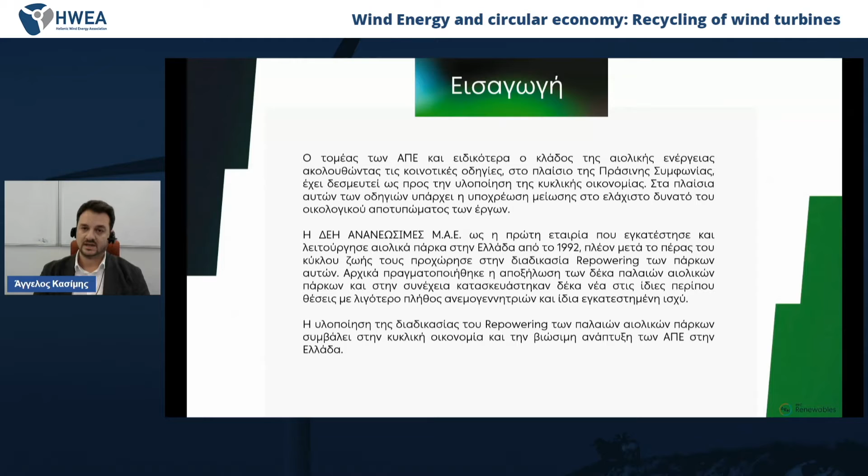PPC Renewables was a pioneer in Greece. It installed the first wind farm in the beginning of the 90s, so closing the end of life of the equipment, beyond the 20 years, we are now faced with the challenge of repowering the equipment. This process started in 2010 and was completed in 2018, and then we proceeded to the installation of new wind farms in the same areas, same location as the older farms.

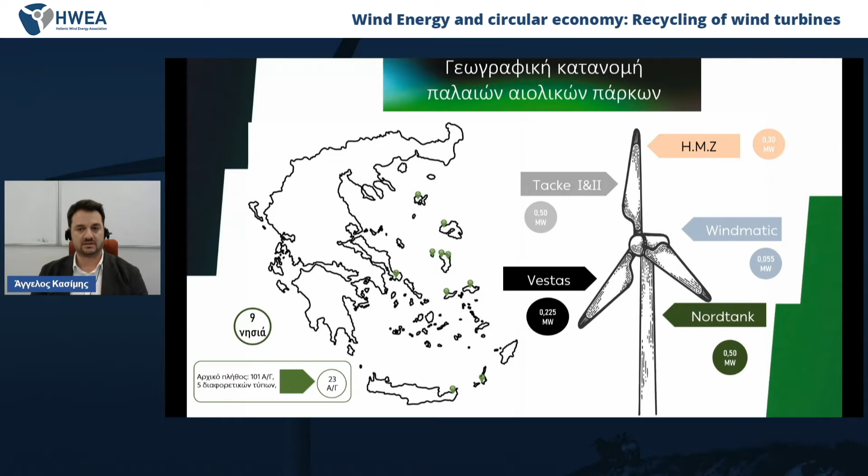The older wind farms which were repowered were on the islands of the Aegean, for example, Chios, Limnos, Samos, Ikaria, Karpathos. In total, we had 101 wind turbines, and by repowering, we have now brought the number to 23. So the maturation and advance of wind power technology is huge, if we also take into consideration the fact that the maximum power of wind turbines was 500 kilowatts in the past. There is no such number currently in production. The installed capacity on average now is 2 to 3 megawatts.

And now repowering has been divided in two stages. The first stage is the dismantling, decommissioning of the equipment, where we decommission, dismantle and manage the components on the ground, wind turbines and air grids. In this case, we dismantle pillars, cables, transformers and the blades. Then, for the second stage of implementation, we dismantle the infrastructures that are invisible, cables and foundations in the ground.

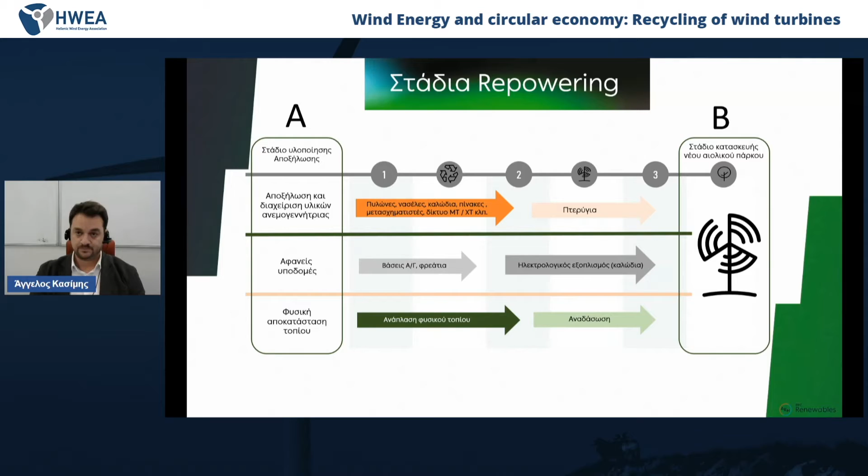The third stage is the rehabilitation of the natural environment on the site of the pre-existing wind turbines, but the number of the wind turbines has of course been reduced by repowering. And in many cases, according to the law and environmental terms, we have proceeded to reforestation activities either in the same area or in the broader region. The second stage has no surprises. This is the installation of the new wind farm at the same site. So a new wind farm is replacing the older one.

The challenges we were faced with throughout this repowering process have been mostly on the islands, where there were lacks in terms of infrastructures. Certified facilities, for example, for management of equipment. There was no expert staff which is needed for such a process. And if you add to the equation the fact that our islands, because of the remote areas where they are located, are dependent on the weather conditions, you can realize that all the works and transportation of materials, machinery and staff have been a headache for the process to be completed.

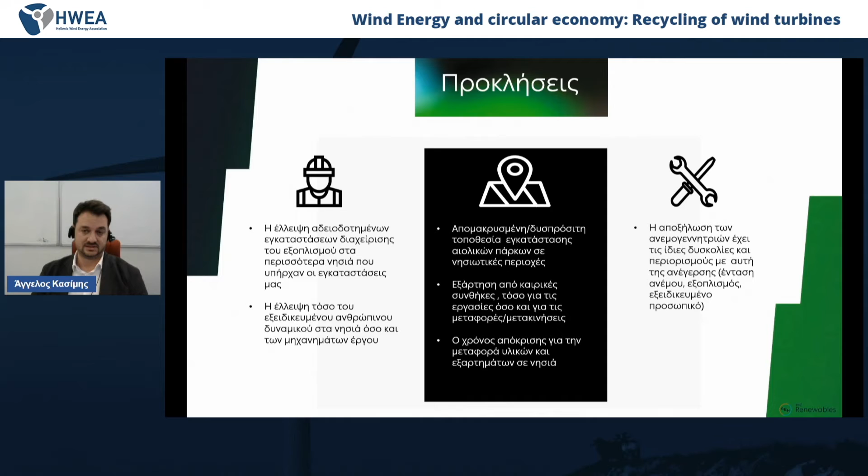Finally, we could say that decommissioning of the wind turbine equipment actually involves the same difficulties and concerns as the installation of new equipment. I mean that you have the factor of the intensity of the wind, for example, which is a major problem concerning the decommissioning or dismantling of the equipment. Now I will talk about the adequacy of the decommissioning entities.

The first thing we have to take into consideration is the technical adequacy of the operator dismantling. They have to have experience on that, and what is more, decommissioning wind turbines of an age of 20 years or older, you do understand that the crews are not aware of the technical problems of the time, back 20 years. So we have to be very cautious which engineering crew we engage.

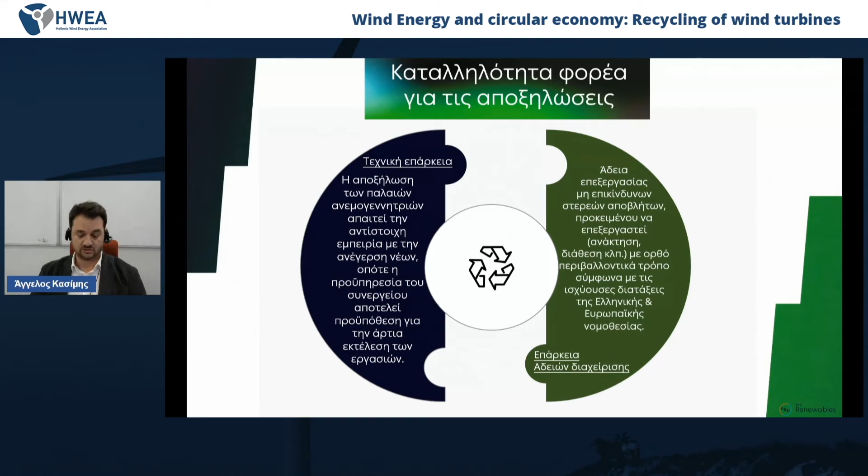During this process, we have to take also into consideration that the sites where the wind turbine equipment has to be transported are both subject to licensed bodies and that the transporters are licensed to handle such equipment. Let's talk about the decommissioned material management options. Once decommissioned, the first we need to take account of is the commercial perspective.

Another option would be to turn all this equipment to scrap, recover steel, and scrap material is then managed by licensed bodies properly. A fourth option that is really interesting, and I would like to welcome ELETAEN's initiative together with the municipality of Trikala, is to repurpose those materials. Parts of the wind turbines can be used such that society can welcome their use.

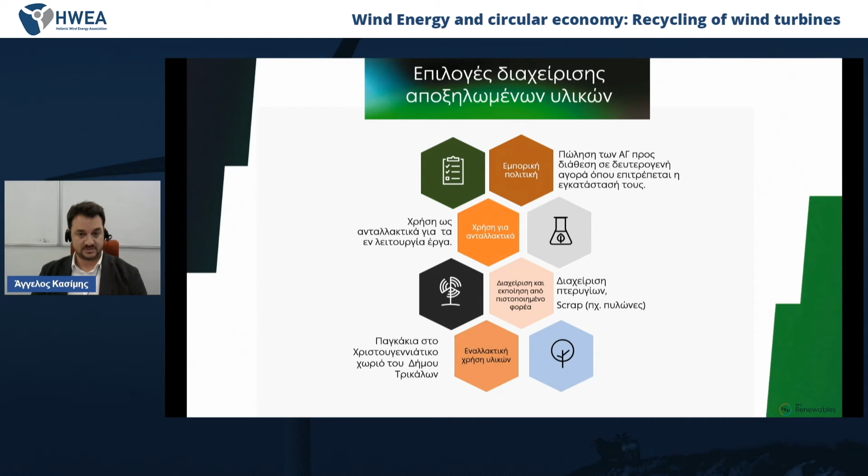An example of that is the Mill of Elves in Trikala, the Christmas market, where blades were turned into benches and signboards within the Christmas village. And we really need to express our gratitude to the municipality providing us with this opportunity, having such a wonderful case demonstrated.

In terms of decommissioning on the site, first and foremost, we need to investigate accessibility to wind farms in order to see whether access of large machinery is possible on site. Secondly, the reverse accessibility has to be considered. We dismantle equipment and store it temporarily either within the farm or nearby, and subsequently, in our case, it is taken by ship to its end management facility.

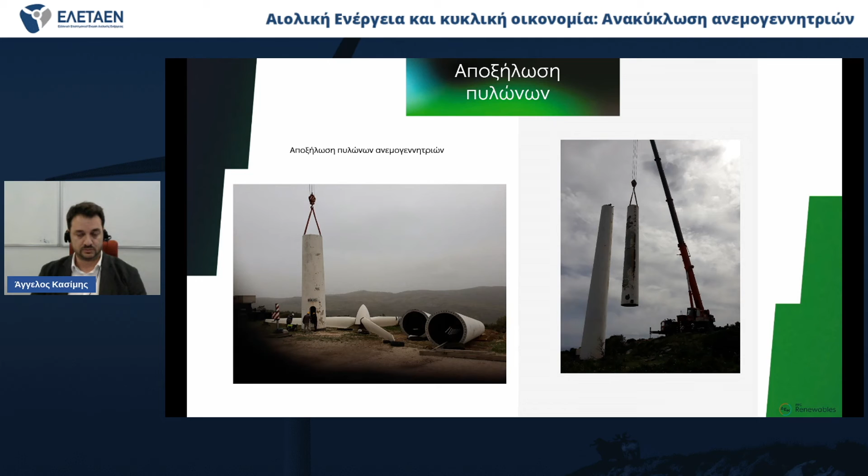Wind turbines are treated in non-hazardous solid waste management facilities. Otherwise, they're taken to other facilities to obtain steel out of the material. We proceed likewise when all equipment is to be transported to secondary markets. Here are some photos of legacy wind farms being dismantled. Material is being arranged within the site, similarly as when erected. And here, in terms of reverse access to site, you can imagine the difficulties for transport.

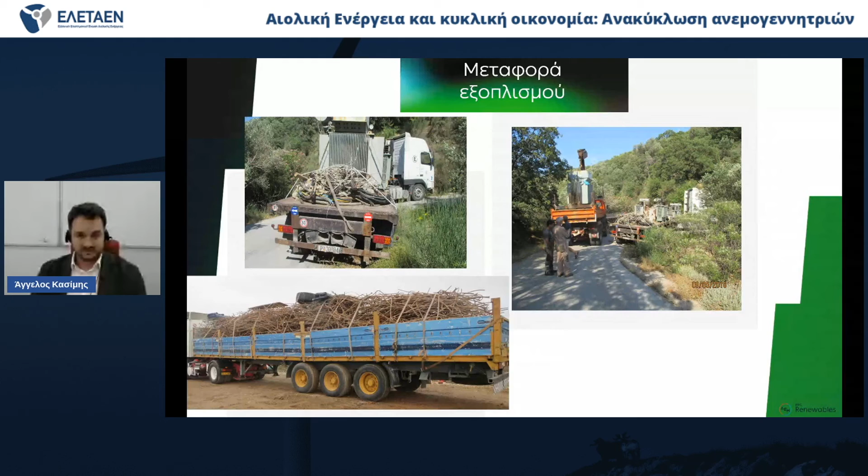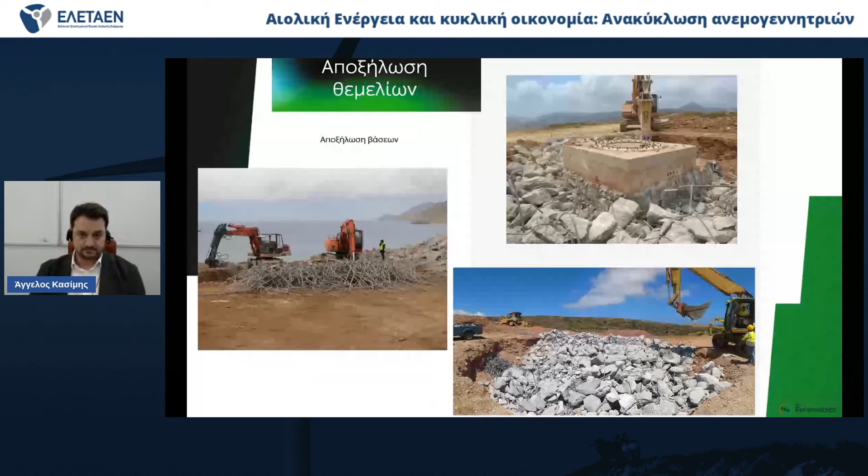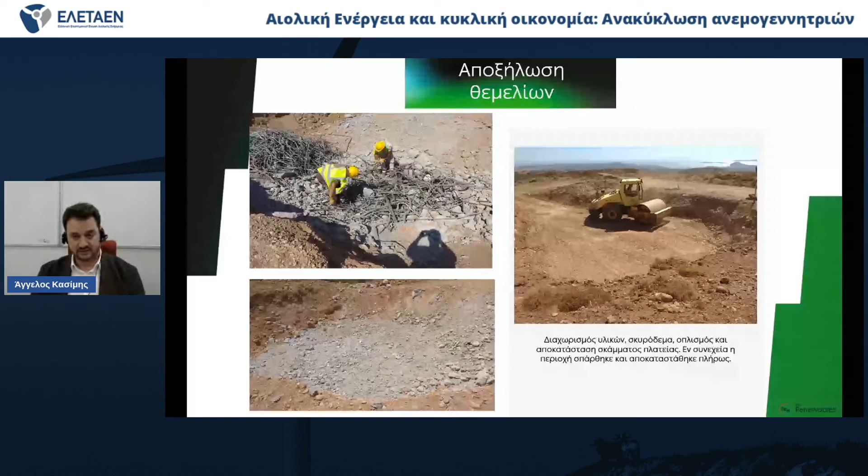At the bottom, you can see a truck loaded with reinforcements obtained from foundations of a wind farm. Here, you can see that foundations are being shredded and materials are being separated. Separation between reinforcement and gravel. Subsequently, after cleaning the foundation, it is backfilled using material from nearby, and finally one can observe that the landscape has been reinstated.

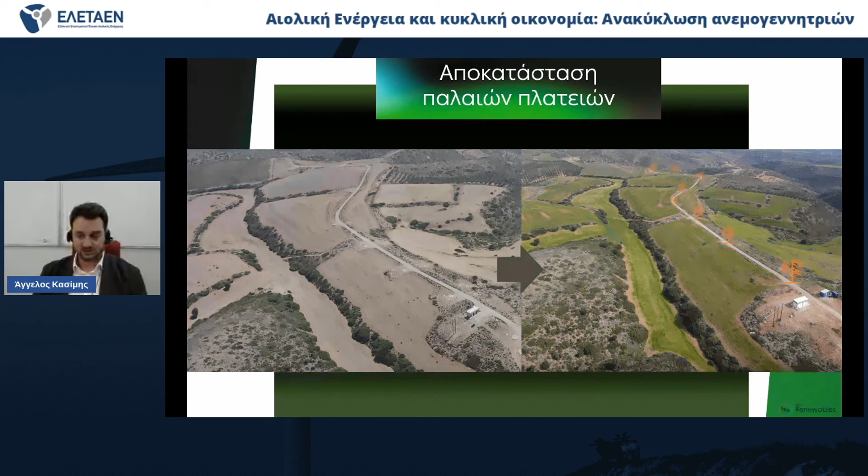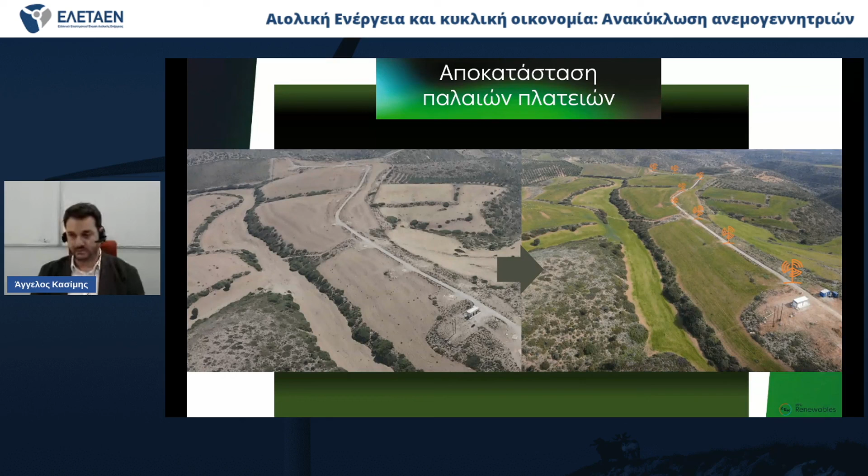At the bottom you can see the two new repowering wind farms. In front of them used to be the site of the legacy dismantled wind farm. On this slide, I would like to talk about the repowering project in the Moni Toplou wind farm on Crete. On the left-hand side is the state of the wind farm after removing the wind turbines. Foundations are still there, whereas on the right-hand side, both foundations and material have been removed, and the natural landscape has taken its place. Turbines have been replaced with two wind turbines of 900 kilowatts each.

Active use of wind turbine materials, such as the Christmas village in Trikala deployment, was very successful. Going forward, we stay in coordination with the municipality, and together with the Hellenic Wind Energy Association, we have further projects in the pipeline.

As to our conclusions, the difficulty we were faced with is that there was no technical guideline in place for us. With the existing institutional regulatory framework and the conditions set for each wind farm individually considered, we have managed to complete this process successfully. It is a lesson we have drawn, and on this approach we will go forward in next projects. Repowering, in our experience, is a very complex and demanding process, equally to erecting a new wind farm.

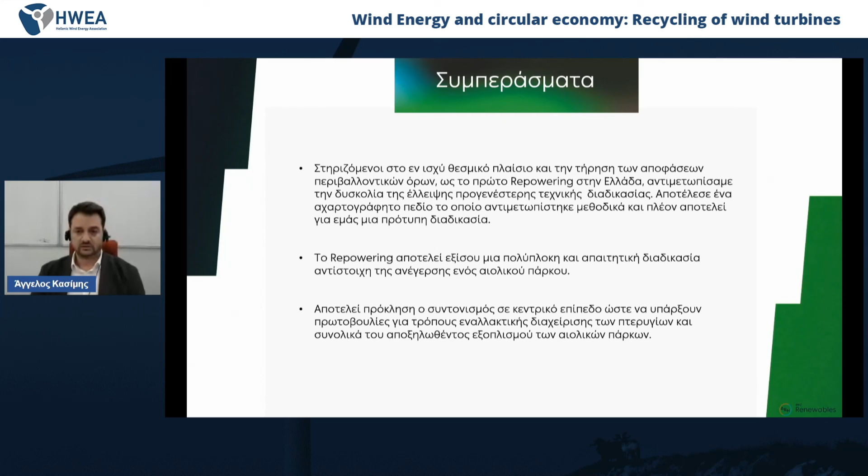And besides the existing regulations, it is a challenge having a central coordination for alternative wind turbine blade management and management of wind turbines in general.